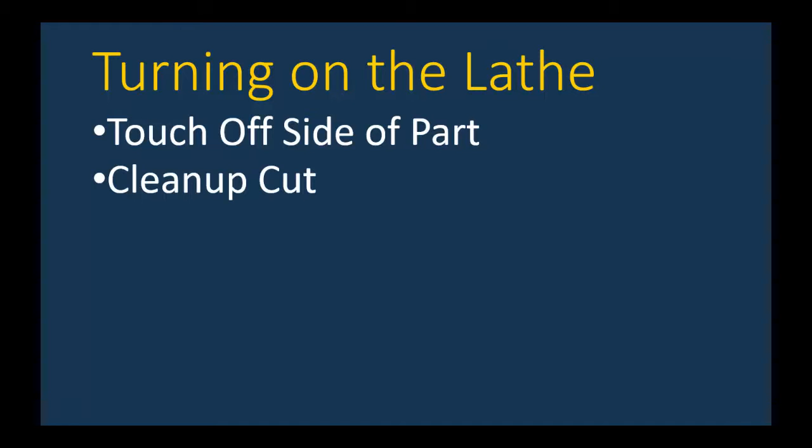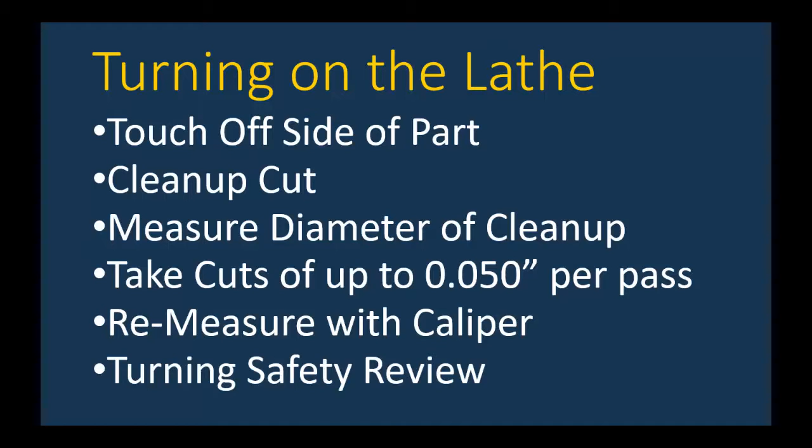First is touching off the side of a part, then the cleanup cut. These are things you heard about when we did facing, but we're going to look at it in the turning operation here. How important it is to measure the diameter after the cleanup cut and in subsequent cuts, the fact that we can take cuts up to 50 thousandths of an inch per pass, the importance of remeasuring with a caliper, and we'll look at turning safety review.

Let's start with touching off the side of a part for a turning operation. We've touched off the part, we've zeroed it. Do you want to go do a turning operation now? Now we'll set up and do a turning operation. We've basically got the tool set up properly for doing a turning operation. So what I'll do is touch off the outside diameter and set my zero, and then I'll be able to measure the part and create a bunch of diameters for you.

Okay, so let's just review. Turning is what we did previously, or facing. Facing was what we did previously. Don moved the cutting tool inward and made that nice smooth surface. Now, Don, that is a perfectly perpendicular surface to the longitudinal direction. Yes, it's perpendicular to the center line of that part right now.

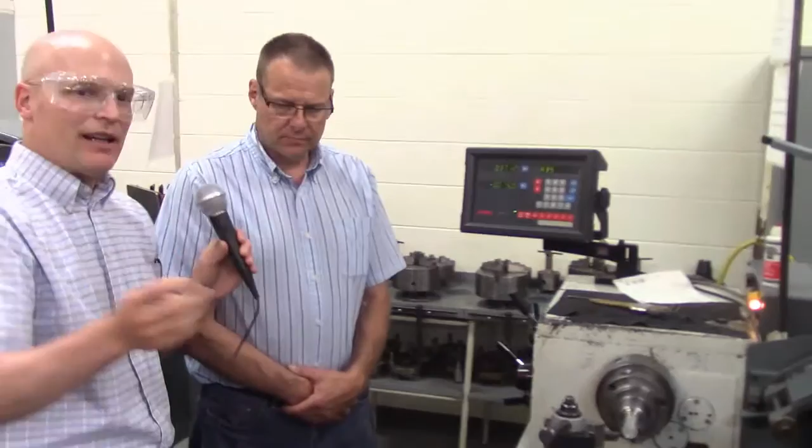Okay, now the next thing is this. Let's say we're going to set this diameter. Right now it's a little bit over an inch. What are you going to take that down to? Well, we can take it down to 7/8 for starts, and then I can take another diameter down to 3/4, just so you can see the value of a DRO.

Okay, how far are you going to go in? Are you good? We can go in an inch, inch and a half. All right, so inch and a half. Now you're saying, do I have an inch and a half? This is where having this is handy, right, Don? You don't have to get the caliper out and do all that stuff. I just lay this in here and I see, oh, we've got about 2 inches sticking out, okay? So that inch and a half is okay.

How close can we get to the collet before we need to be concerned? Don't hit the collet. All right, don't hit the collet. Leave yourself clearance. So if I need my part to be 2 inches long and I need a cut-off operation, then I need to pull my part out a little more. The collets are expensive, the collet closer is even more expensive. You remember I talked about the madman with the red face coming at you if you did something wrong? Messing up a collet and collet closer will probably get that man to come towards you.

Fire in his eyes. So, Don, we are going to go 1.5 inches inward at 7/8 inch diameter. Okay, show me what we need to do. Right, I'm going to start you off. I'll turn the spindle on. I'll set my outside diameter, and if you guys just follow along, we'll narrate as we go.

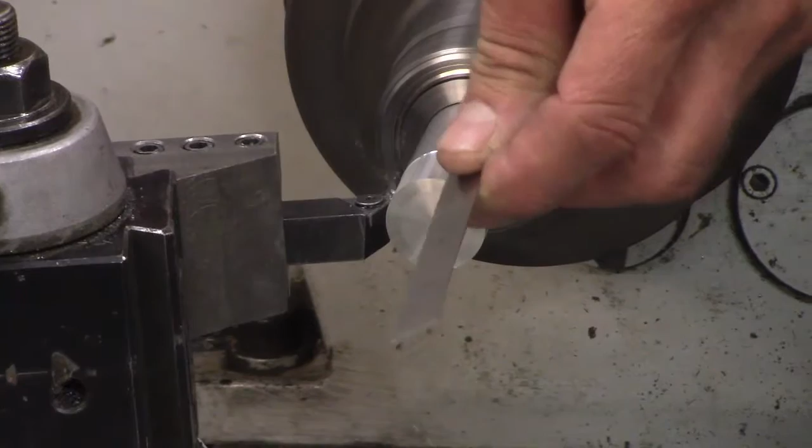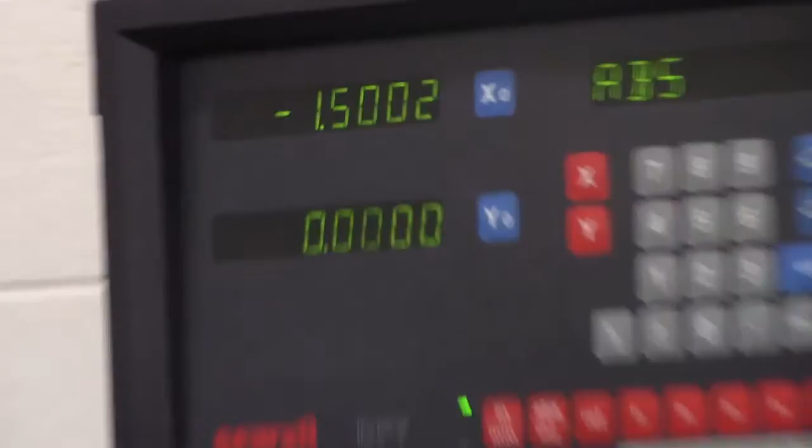Now once you have that 0 set in the DRO, you're ready to start making a cleanup cut. Now before you do that, you want to move the tool in the positive X direction, in other words away from the spindle, so that we can move it to a different diameter position. So moving in the positive X direction just to make sure the tool is not going to be hitting into the part when we change Y.

Alright, let's look at what a cleanup cut looks like and what we do from there. I'm going to turn this up about 15 thousandths extra, bring this to 0. I'm about 15 thousandths. So now two things I did by doing that is I verified that the dial on my cross slide is pretty much the same as my digital readout. I got 15 thousandths here, 14.8. That's pretty close. I'm going to re-zero here.

All right, wait a minute. I thought we zeroed when we touched off. Oh, then you messed around here? Yes. I want to take a little deeper cut. I want to establish my tool 0. I'm creating a reference for my tool so I know. All right, so it's at 0 now. So if I move this down, I shouldn't be taking hardly anything off. I'm going to take 15 thousandths off. You're taking 15 thousandths off right now.

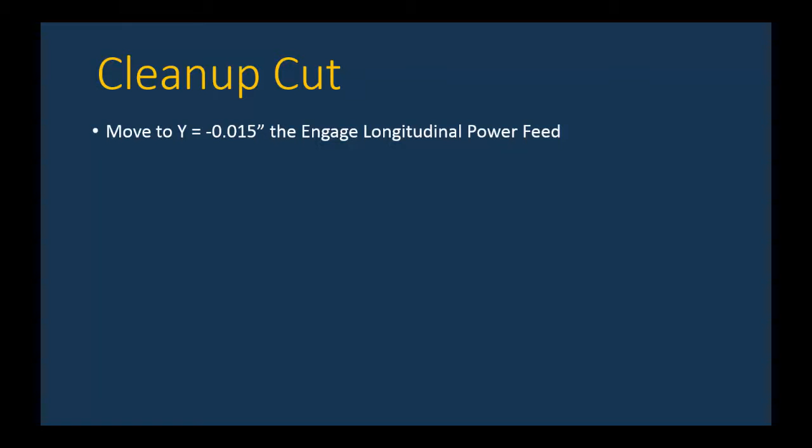Yep. Oh, okay. So I can use this where I can use my scale. Be very careful. Right? So I'm not watching the digital readout. I can just be very careful. Watch this like this. I can look up here to my digital readout. All right, he did that. He turned. Wait a minute. So you turned off the power feed. Yep. I turned off the power feed at about 1.400. Okay. All right. Now, you're going to turn this off, or you're going to just move the part away.

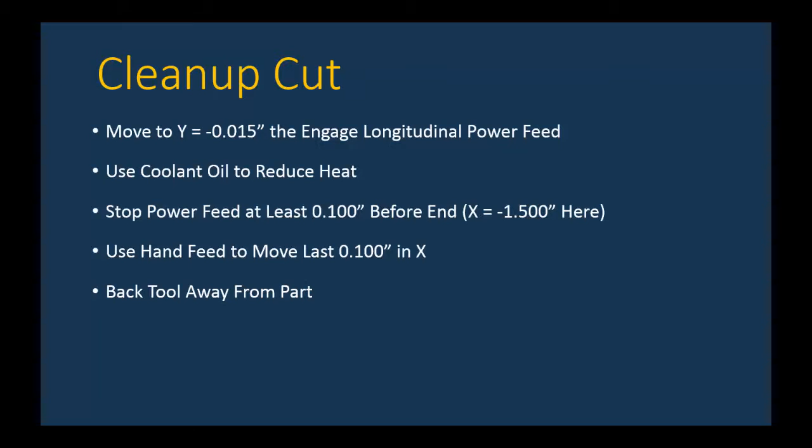All right. Now, in that operation, Don, I got a little bit confused because you touched off, you zeroed the Y, all right? Then you used a cross slide and you went in minus 0.015, and then you hit 0 again. Right. My stock is starting out at roughly 1.003, 1.004. So I know I got room to play to get to 0.875. So I want to take a nice cleanup pass so I know what the tool is actually machining size-wise.

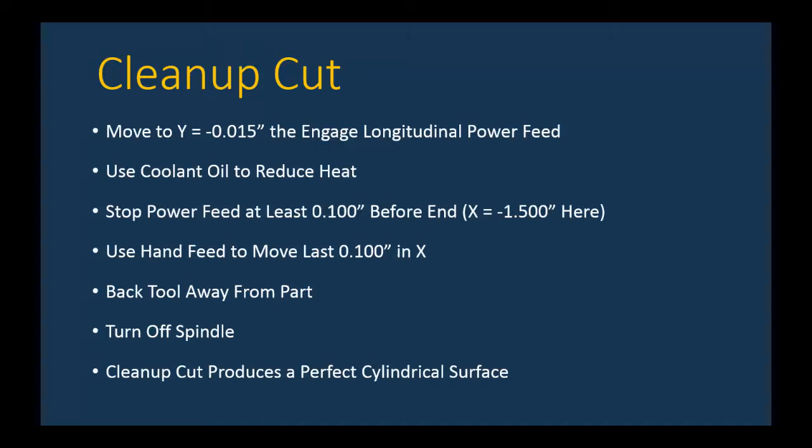So we wanted this to go down to, what, 7/8 of an inch? Eventually. 7/8 is what? 0.875. So it was an inch. He took off 0.015. We're down to 0.990.

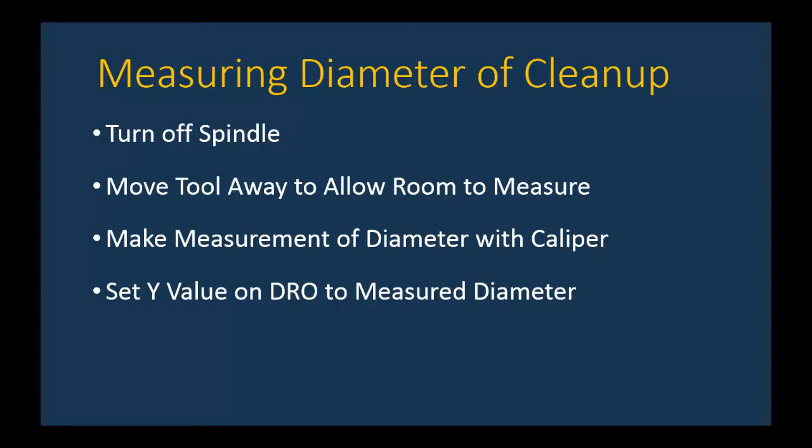990. Because we're dealing with a radius or a diameter, I can actually tell this DRO what diameter I've just turned. Otherwise, if I keep zeroing each time, if I'm at 990, I'd have to do the math. 990 minus 875, and that's how much material I would have left. I can let the machine do all the thinking for me. Okay. I think I see where this is going.

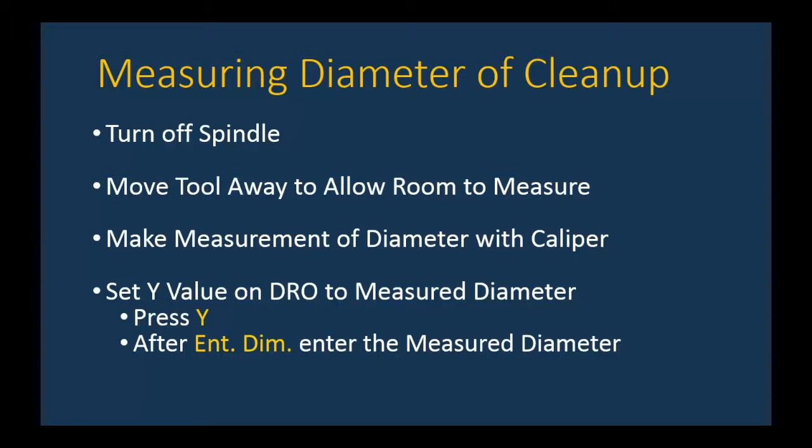Don, you just did this small cut off there just so you have a nice, true cylindrical surface. Correct. You then measured it with your caliper. You found it was 0.990. Correct. All right. So now what are you going to do? I'm going to input that number into the DRO. So in other words, I'm telling the machine that I'm qualifying this tool. I'm telling it what size diameter this tool will be turning at any given time.

Okay. So I push the Y. I get an enter dimension up here, and I'm going to put in 0.990. And as you can see, I entered this over here as Y. I hit the ENT, enter button, and now it says 990.

So let's review the idea behind a cleanup cut and what it's used for. First of all, while the cutter is out in front of the part, what I mean by that, further away from the spindle than the part, you can use the cross slide to move your DRO into a position that's 15 thousandths of an inch inward, toward the part. Remember, we've touched off and made Y equal to 0, the current outside surface of the part.

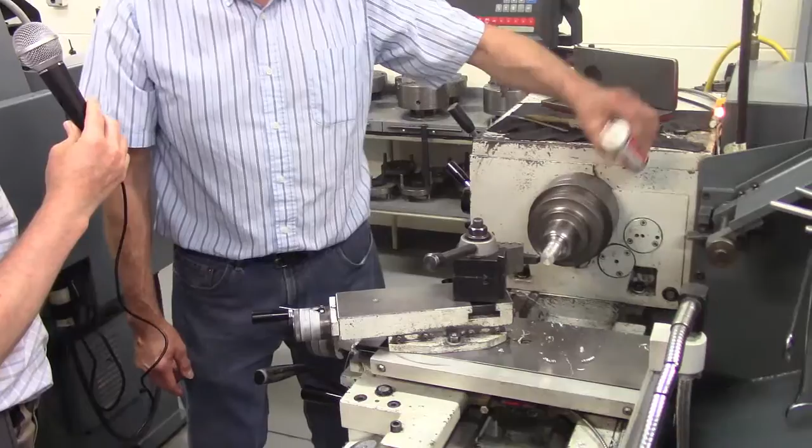We want to move in about 15 thousandths from that, and we're going to do what's known as a cleanup cut by engaging the longitudinal power feed. This is done by taking the power engage handle, pushing it in, and going up. Remember in the last movie when we did facing, we pushed it in and then went down.

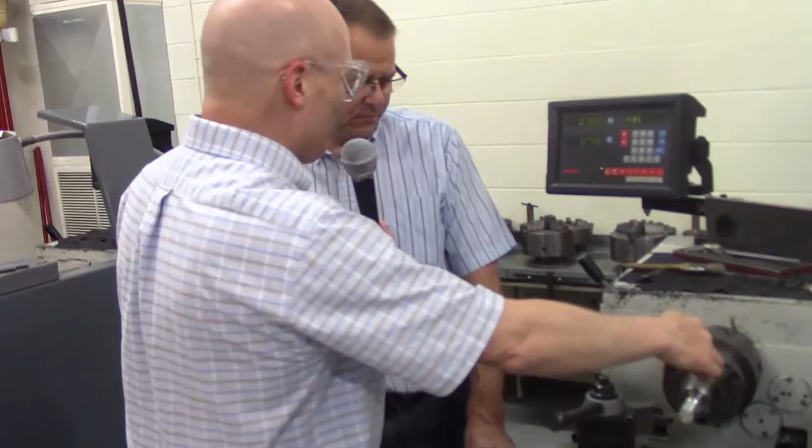But for longitudinal feed, and when it's in the forward direction, a longitudinal feed is going to move the cutter in toward the spindle. So we're going to take off 15 thousandths of an inch off this part. While this is cutting, you should put some drops of coolant oil in to reduce heat.

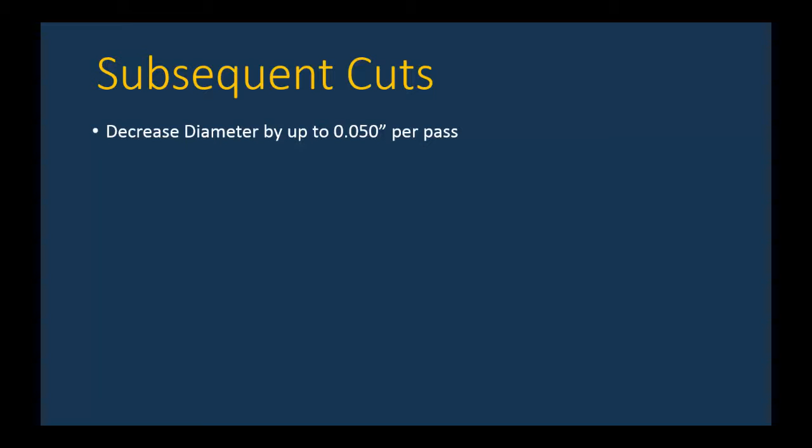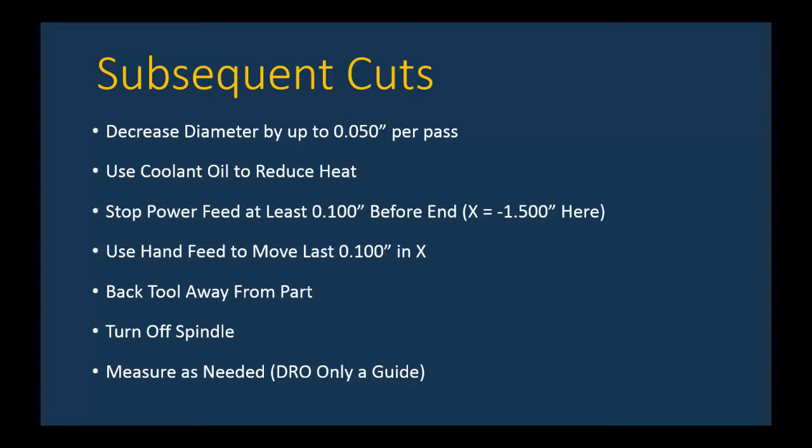And you want to make sure you stop the power feed and disengage it by pulling it downward and inward into its neutral position about 1/10 of an inch before the end. Now in this case we wanted to get to a length of 1.5 inches, which when you're going toward the spindle is in the negative direction. So we had faced off the end in a previous movie and called that 0. So 1.5 inches toward the spindle would be a coordinate of minus 1.5.

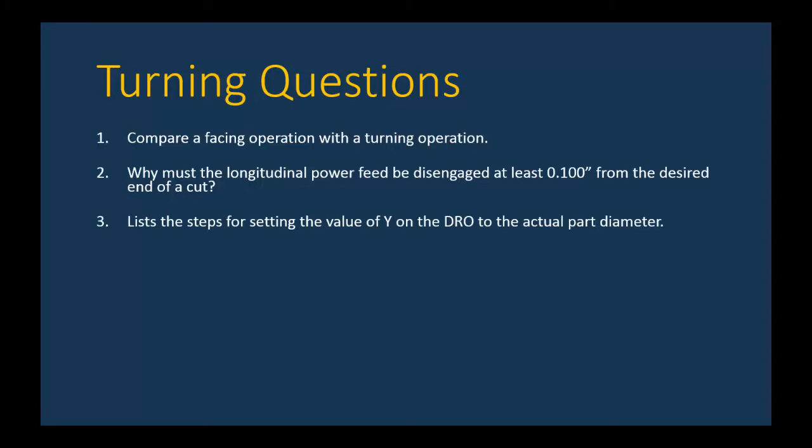So at about minus 1.4 you disengage the feed and you use the hand feed to move it in slowly the last 1/10 of an inch until you get to exactly minus 1.500. You can then back the tool away from the part, both in the positive Y direction to move it toward the operator more away, and then you can use the X to crank it away from the part and away from the spindle. You can then turn off your spindle after you're done with the cleanup cut.

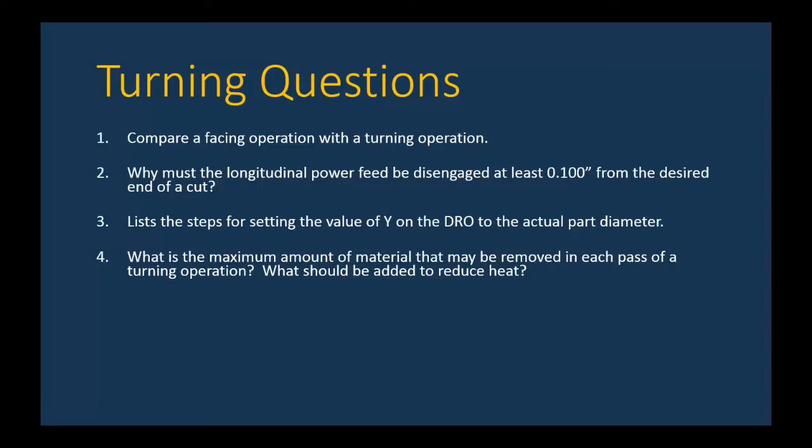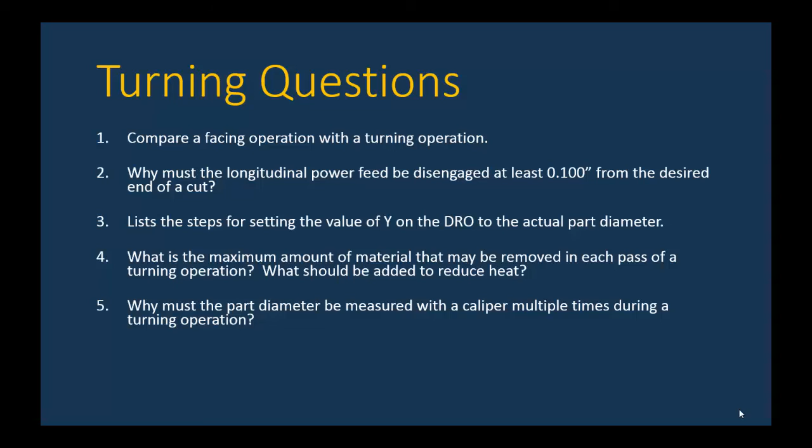And what the cleanup cut does is it produces a perfectly cylindrical surface. So when you take a piece of stock just off the rack, it may not be perfectly cylindrical, and therefore taking diameter measurements may not be completely accurate. But after you do a cleanup cut on the lathe, you are now going to get a geometrically nearly perfect surface. Obviously there is nothing that's ever absolutely perfect, but this is as good as we are going to get.

All right, now along with that, we want to measure the diameter after the cleanup. So we talked about you turn off the spindle, you move your tool away. You don't want to be in close proximity to the sharp cutting tool anytime your hands are there. You make the measurement of the diameter with your caliper, and then we're going to set the Y value on the DRO to that measured diameter. And from then on out, the Y value on the DRO is always going to show the actual diameter of the part.

So to set this Y, you press Y on the DRO. Then you're going to see a prompt on the display. It's going to say ENT dim, means enter dimension. And you're going to then type in with the keypad your measured diameter. You're then going to press the ENT button, and that's going to register that diameter at that cutting position.

Okay, now we're going to talk about taking some subsequent cuts. Our goal eventually is 0.875. So we're just taking a little bit off, and now Don turns on the machine, and he's going to push the crank in and up so the power feed is moving us inward. Okay, and he's stopped. Don, what's the matter? Nothing's the matter. I just need enough to make a measurement. Oh, okay. I got a lot more room to go, so I don't want to waste time with just a little bit.